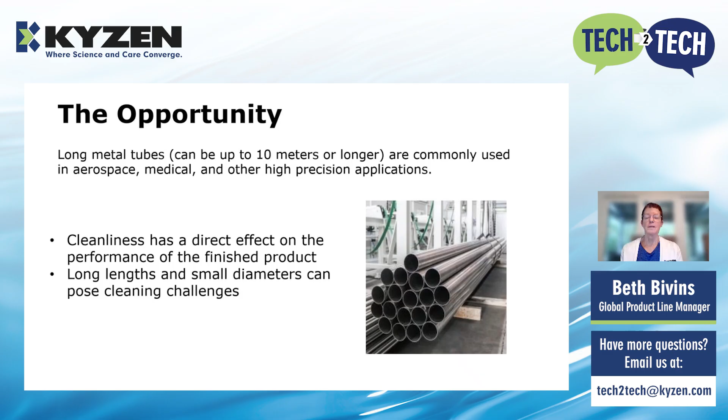So because of the nature of the industries, the cleanliness can have a direct effect on the performance of the finished product. And the long length and the small diameter can pose the cleaning challenges that these guys face. So the challenge has come to light as the US EPA has started to regulate some chlorinated solvents like trichloroethylene and perchloroethylene. So we had been sought out by a few of these long tube manufacturers who were looking to replace that. And another one had a very old aqueous cleaning system that was being further regulated by the state where they are, and the water discharge was a problem. So that was the challenge of finding something new.

And then the cleaning challenges include getting the cleaning solution into the entire tube, because as you can imagine, with a 30-foot long tube, it takes some sort of pressure and flow to get it into the tube. Getting it out and then drying, of course, is a big challenge, especially the customer using water was having a lot of drying issues. So the cleaning solution challenges, as I mentioned, these chlorinated solvents are being phased out. Many machining oils that are used by these companies, and they also use coolants that are not soluble in aqueous chemistries. And then in some parts of the country, there are VOC restrictions and water restrictions, as I mentioned, with the one customer.

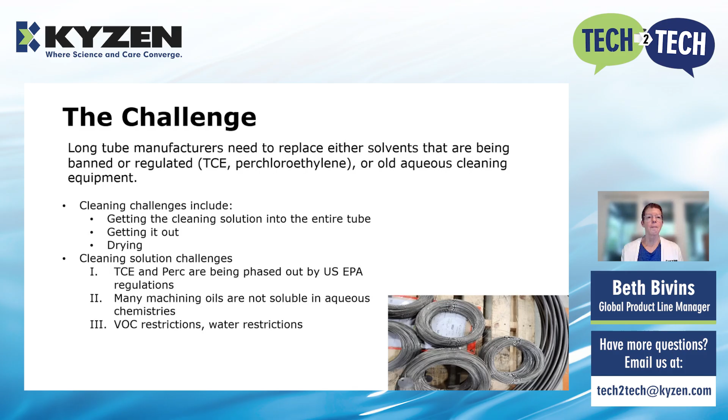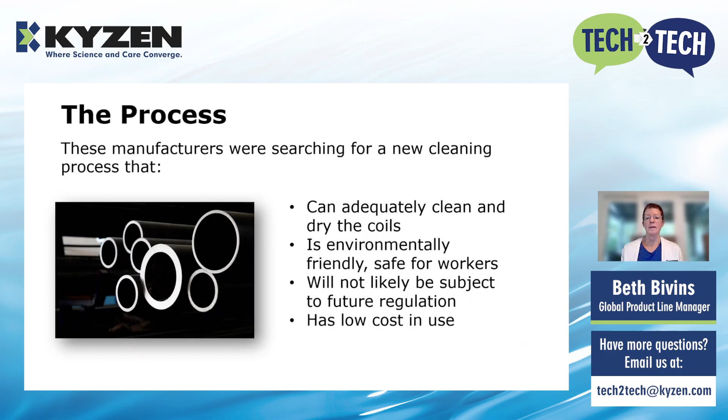So these folks were all searching for a new cleaning process that can do the things that I just mentioned: clean adequately and dry, environmentally friendly and safe for workers, will not likely be subject to future regulation because it's a big process to qualify something new, and has low cost in use. So in the solution, this year alone, we've had 4 long tubing manufacturers convert to a vacuum vapor degreasing process with our modified alcohol solvent, METALNOX M6386. So as I mentioned, 3 of them were using trichloroethylene and very old degreasers. One was using an aqueous process that was being regulated by the state that they were in.

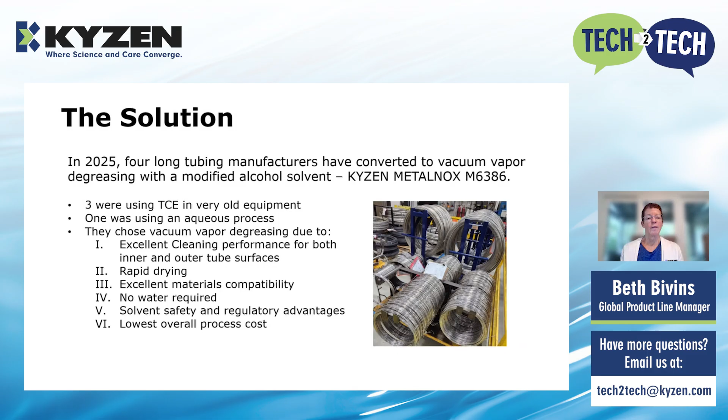So they chose the vacuum degreasing process due to the cleaning performance for both the inner and the outer tube surfaces, the rapid drying, good materials compatibility, so the solvent is compatible with the metals that these tubes are made of, no water, the solvent is safe, and it has regulatory advantages over these older solvents, and the overall process cost was the lowest.

So the METALNOX M6386 is a water-free solvent. It can clean both polar and non-polar soils. So if you happen to have something that's polar, it can clean that. It's not a PFAS. It doesn't contain any PFAS materials. It can clean things with oils or with water-based products. And it's distillable and highly recoverable. And the composition doesn't change as it's distilled.

So its environmental qualities: it's non-hazardous, it's biodegradable, it's RoHS compliant, it doesn't contain any fluorine, chlorine, bromine, iodine, no HFEs, no HFCs, all these things that are in the news at the moment. It's REACH approved, it's not a hazardous air pollutant like trichloroethylene. The folks using trichloroethylene had to get extensive air permitting in order to be able to use that. So to get away from that was a very good thing.

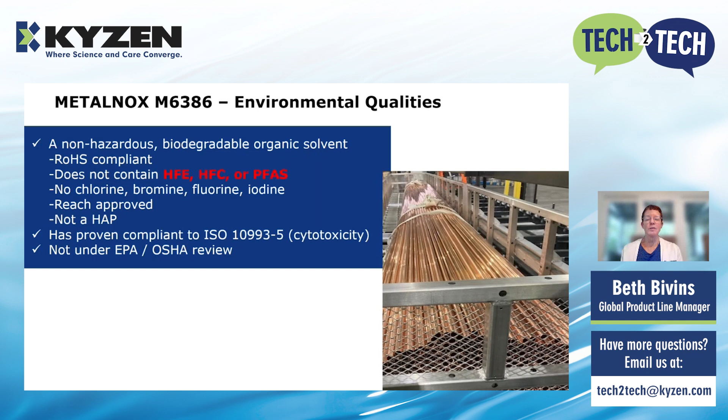We've done testing to prove that it's very low in cytotoxicity. Actually, there's no cytotoxicity. And it's not on any lists by the EPA or OSHA, or even in other countries. It's not on any lists for any type of review.

There's only one chamber in the machine for the cleaning to take place, and it usually will pull a vacuum, flush the tubes with vapor or solvent or both, and then immersion or sprays, a vapor rinse, and a vacuum dry. And most of the time, they also use ultrasonics in the cleaning.

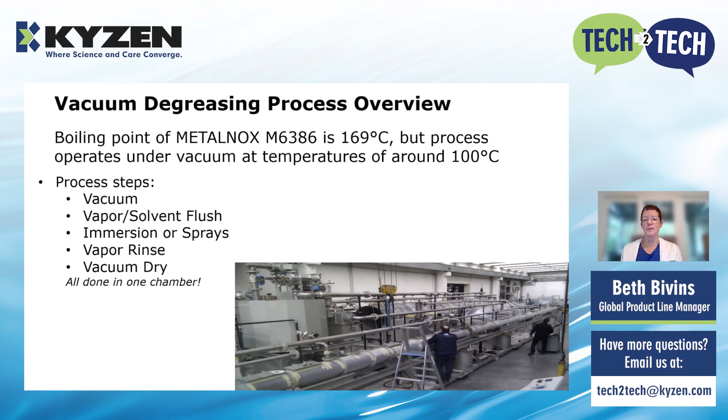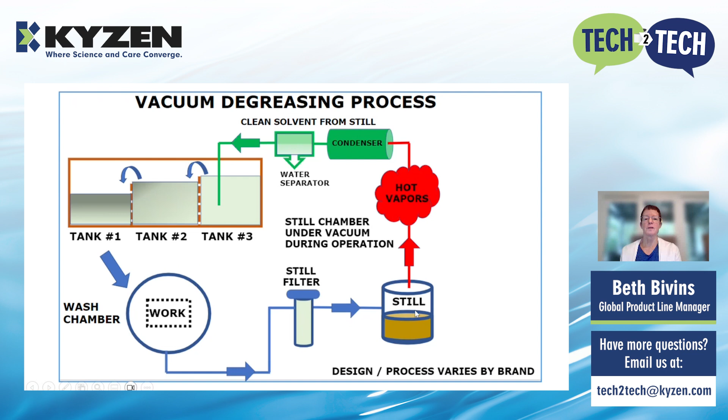So this is just a schematic. It's a much simpler schematic than this machine down in the bottom. But basically all the cleaning is done in this one chamber, in the work chamber. And then there's usually cascading tanks of solvent. So it's cleaned with the dirtiest solvent, and then cleaned again with the cleaner solvent, and then the final rinse is done with the cleanest solvent that comes from the distillation system. And the whole thing is done under a vacuum.

So in conclusion, this has proven to be an excellent alternative for these 4 customers, and I'm sure there are others out there. And some things to consider in the future would be environmental regulation changes that can continue to affect older generation solvents and possibly the equipment. The changes could affect the solvent supply and pricing.

And now we have to worry about tariffs. So some of the chlorinated and fluorinated solvents that are still out there are coming from foreign countries that are subject to tariffs. And also the metals themselves that are used to make the tubes and coils could be subject to tariffs. So solvent conservation and cost savings anywhere that you can get it is a good thing.

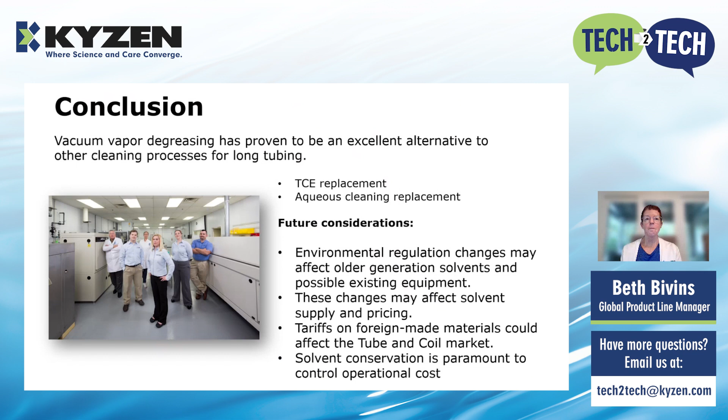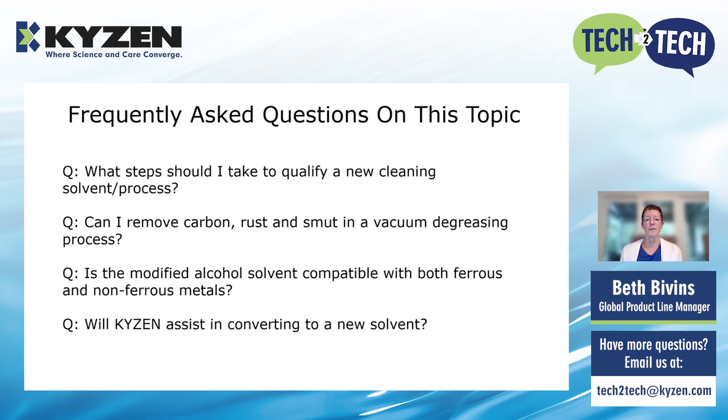And will KYZEN assist in converting to a new solvent? Yes, absolutely. We have a vacuum degreaser in our lab where we can run tests. Of course, we don't have a long vacuum degreaser, so usually the customers would start out by sending cut up tubes to the lab, and we would show on a small scale that the process worked, and then eventually they would go to the actual machine manufacturers and do some sort of a scaled up cleaning trial.

And that's all. Have a great day and good luck in finding a new cleaning process.